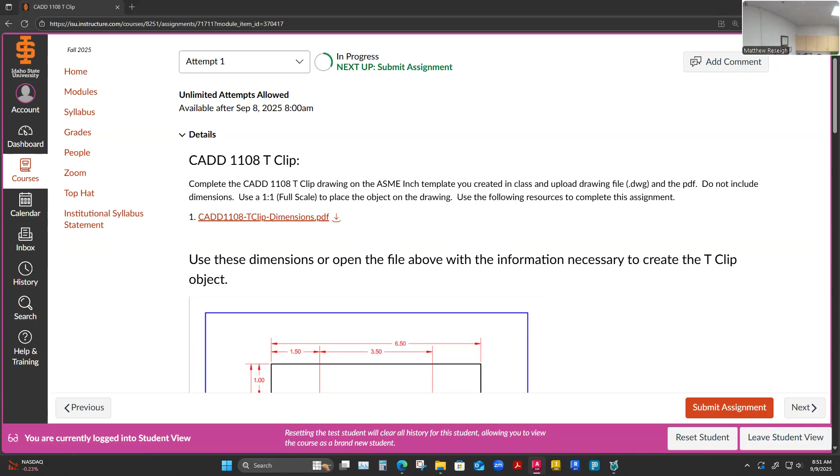So I'll open up that, make sure that I can here. Should be the T-clip dimensions, right? So I have it. This is it. This is what we're going to do.

I should have all the information here I need. It's really just a big, long, odd polygon, really. So I might just pick any point to start. But I might hit dead ends on this too, so we'll have to see.

I don't have any degree measurements given. In ASME standard, it's not always—in fact, I should hold my tongue here a little because I think you can add degrees to drawings, and in some places I worked, degrees were just a really great dimension to go to. But ASME, like my preference, is to do almost like coordinate value dimensions, giving an X and Y dimension to lock in a point, kind of like this point here to start this drawing might be, you know, 1 3/4 over—well, I don't know, let's just think.

So I'm just thinking of the way I would proceed to draw this. I could really start up here, and I'm kind of starting to pre-plan my draw here. So if I start this object here, I could go 1 inch down. Then I don't know what this length or degree is, other than it kind of ends at 4 inches, but I really don't know what slope this is.

And then it would pick up, and I would have a dimension here that's not explicitly given, but I could probably figure it out. So I feel like this could be a little difficult to figure out. I could definitely do some construction line work given what I have, that I come 1 inch down and then 1 3/4 over here, and I can lock in where this point is to figure this out.

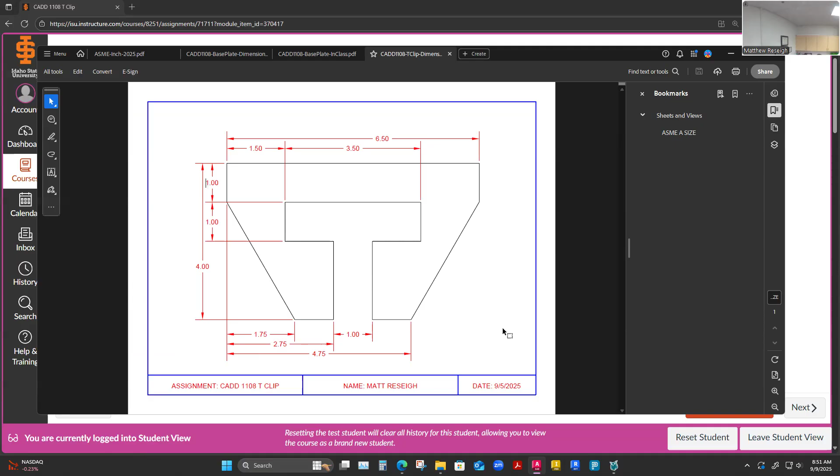So in this case, I could almost revise this dimensioned drawing to maybe be a little bit more clear. There is some room for error here maybe, but let's just see if I have the information given. If I use some construction line work, can I figure out where this would be? Let me show you maybe a little technique for this.

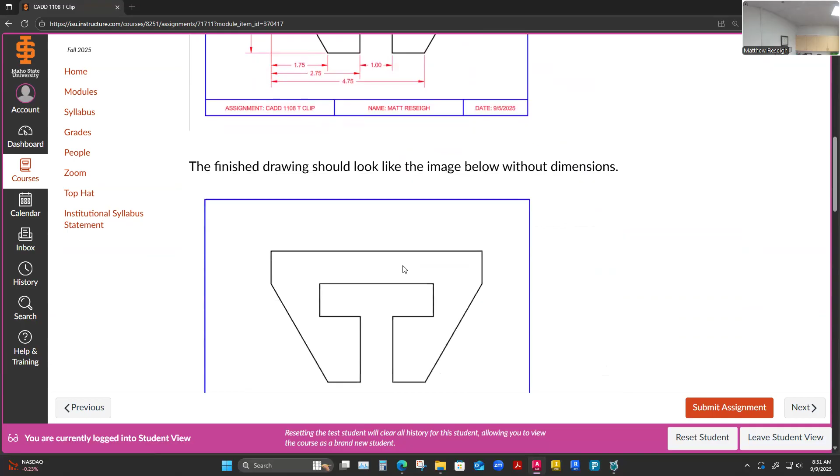So I'm gonna have this up on my other screen, and I'm gonna open my template file. Essentially I've got—this should be the same file that I just opened, and then this is essentially what I need to finish. So pretty similar.

I guess on the last one I didn't go through the rubric to see, but I was hoping on that last rubric maybe it did say something about the circles and the 1/4 inch extension on the circles. I'm not going to worry about it in this assignment, but just pay attention to your rubric too.

This is the way you self-check your drawings, and we'll get into self-checks and how critical they are. Nothing should be submitted until you've done a self-check and gone through these line items, checked back to your drawing and asked, did I catch that? Did I catch that?

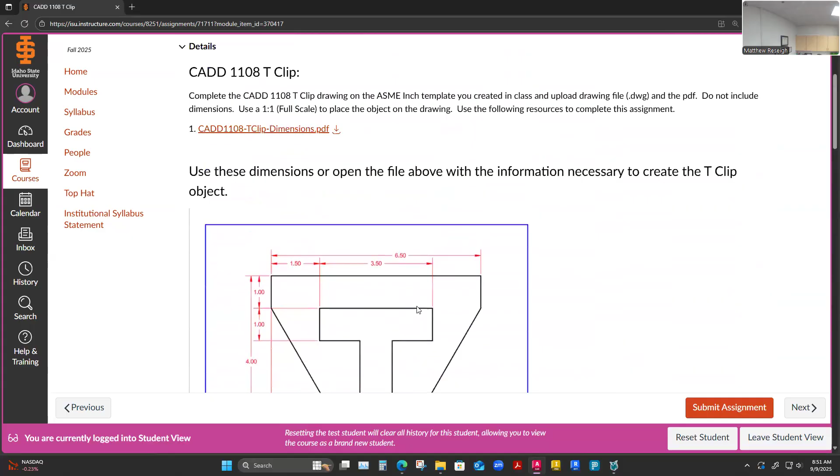So a rubric is essentially like a self-check, and it works really well because usually we don't submit drawings without doing a self-check, even in the industry. No checker in the drafting world wants to catch everything themselves. They'd like you to self-check and catch a bunch of stuff before you submit it to another set of eyes. The more organized the company is, the better the self-check process is. And usually even the checker has a specific list of checks they're looking for.

Let's do this. I'm going to go to CAD and open up my template. Funny how that makes my screen inactive. I like to do this repetitively because I have to look for my DWT file - the more repetition we do, the better you lock into a routine. So I just need to find my template, which I'm getting good at finding. Open it up, and immediately do a save as to get it into a drawing format. I'll remember to check this time.

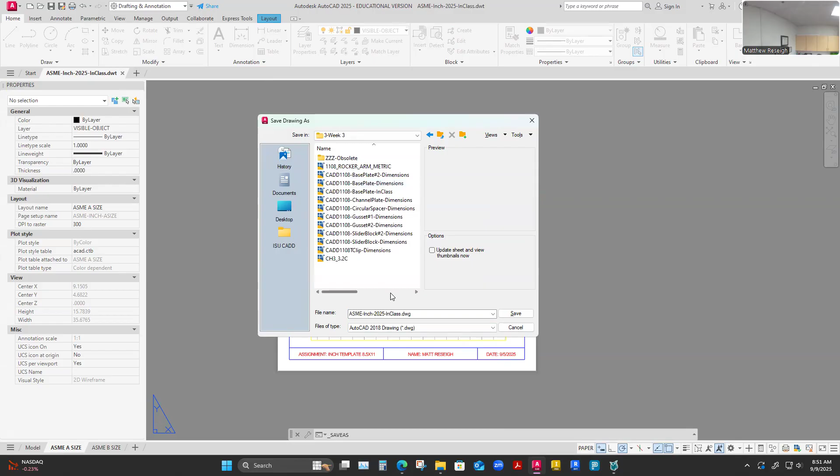I want to put it in the same place - week 3 is where we're doing these things. This one is the T-clip, right? I'm going to change my name just a little bit. I selected that one because it populated that name when I clicked on it, and sometimes I use that to my advantage - if something is roughly the same name, I can click on it and it'll auto-populate the name. If you keep it the exact same name, it'll ask if you want to overwrite that file, and I don't want to change any of these. I just needed a slightly different one since I do these in class.

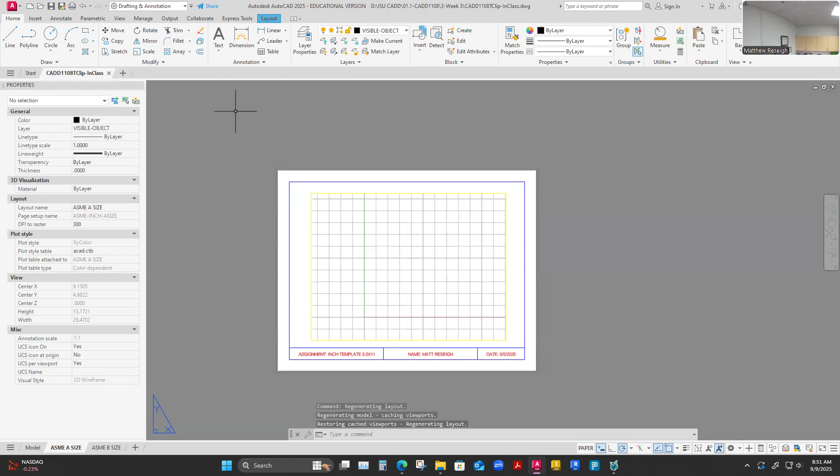Is how I notate this, right? T-clip in class is how I differentiate my drawing for myself. I'm going to save this now - it's a DWG up top with a different name. Love it. So I'm going to go over and draw now. I've got that up on my other screen. I think I told you I'm going to start in the upper left of this one, and maybe I'll start with... I know what I'm going to do.

I'm going to turn on my construction layer, make sure it's on. If you've read some of the PowerPoint slides or the textbooks, they talk about the glass box method. I like that my construction layer is light blue because it looks like a glass panel. I'm going to build a little glass box - a single pane, not a three-dimensional object, just a front view or a single view. I'm going to build a box that's the overall dimensions of this part, which might help me narrow down the geometry within that boxed-in shape.

So what I'm saying is, and you'll see me do this method especially when we get to orthographic projection, where we have a three-dimensional object and we're drawing a top, front, and right side view - I like to use this method to capture where that view fits. If I look at this part, just the overall rectangular shape, this part is 6.5 inches wide by 4 inches tall. So I'm going to make myself a construction rectangle that is 6.5 by 4, and everything I draw will have to fit within that.

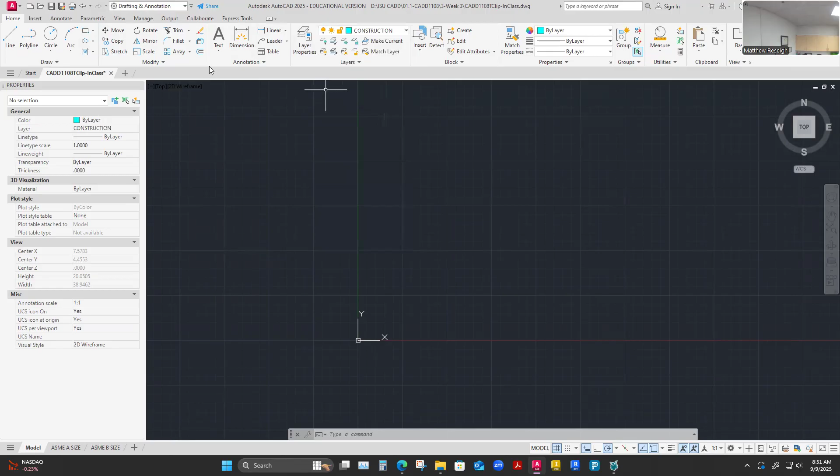So here, I'm going to move to my construction layer and draw a rectangle anywhere on here, but I want it to be like this little glass pane. So this is going to be 6.5 inches in this direction, tab, and 4 inches in the other direction, right? I don't know.

I should have it up on my screen somewhere. Yeah, right here, 4 by 6.5. So all I've done is just done the box where that fits in. Now let me see if I can piece together some of this. There's a lot of different ways I could put this together.

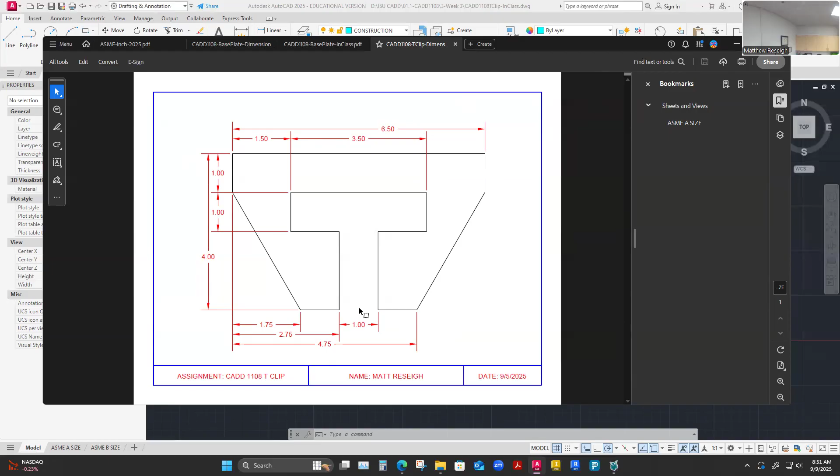So a way I could proceed with this, not the only way, but a way I could proceed, is I'm going to draw some visible line work now, some of my visible object. I can do a line, sure. Maybe I'll join it all at the end.

So from here, the shape goes down 1 inch. I haven't clicked, I just dragged down to 1 and clicked there. So it goes down 1 inch there, okay. Maybe I'll go back this direction now.

So it's there. Then it's going to come over 6.5 inches. And then it's going to come down 1 inch. Maybe I'll escape. So I've been able to pencil in that much.

1 inch there. Now that from that point, it's going to come at a slope until it hits a point down here. I just need to know how long that is. Well, it's like 1 3/4 according to my drawing.

So I could actually come over here with my line again, lock into this one, pull this direction and say 1.75, that's 1 3/4, hit enter. It's going to move me over there without drawing. And that's what I want.

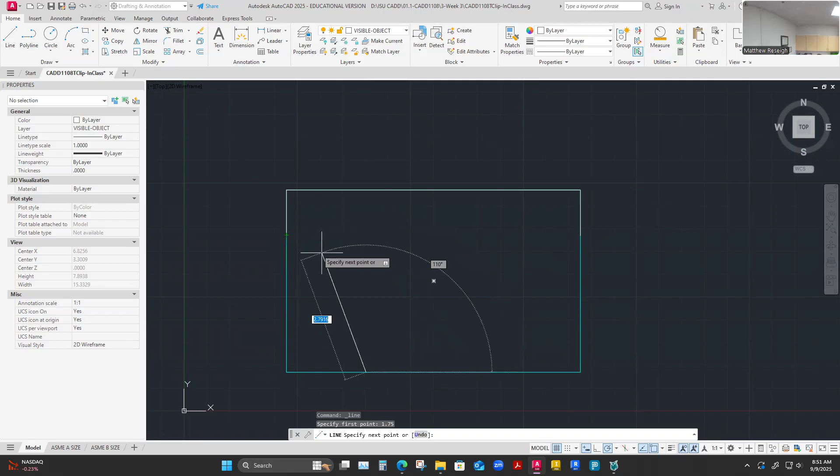Then from there, this thing comes up to here, and I want to lock in on that endpoint. So I might have to zoom in, look for that endpoint grip to show up. Yes, so that way I almost use my glass box method to kind of constrain myself. I don't know what that degree is. I just know that it's 1 3/4 over from this particular plane.

So then I pick up on some more dimensions, right? Like it goes over 2 3/4. And if I'm looking at how far the next thing is right here, I've got that point, I've got this line in. Then I need to know how long this is over.

Well, I have to do some math here. Whoever's dimension this hasn't given me that explicitly, that dimension. So I have to do some figuring. And this is when you get into working from something like this, you're already working from someone else's drawing, and you kind of realize, would that have been handy to have that dimension put on there?

Would it have been redundant? Should it have been put on there? These are all questions you have to ask yourself, because right now I have to make a human calculation here. And can I make a human error? For sure. So right now I have to say that's 1 3/4.

This next one over is 2 3/4. So I can do the human error, I mean I can do the math and say that's 1 inch over there. But what if you mess that up? Then you got a messed up looking part. So you would wonder if this dimension would have been nice to have explicitly displayed on here.

And that's just a question you have to wonder. It really highlights it when you work from your own prints, whether or not you've left somebody doing some math on their own. In some cases it's okay, and in some cases, should I have not made them do math and have to mess something up potentially?

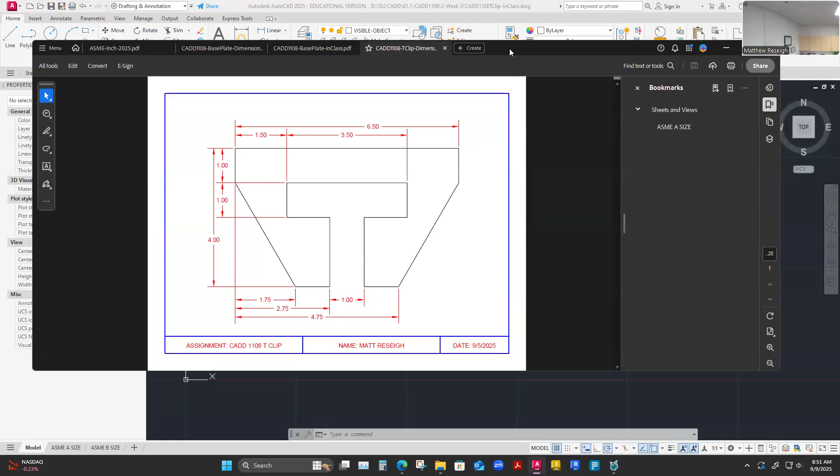So sometimes when I'm working like this, I'll make notes of maybe something I might need to define better on my own print. So these assignments that are given to you aren't meant to be perfect for sure - they're trying to create that thought process.

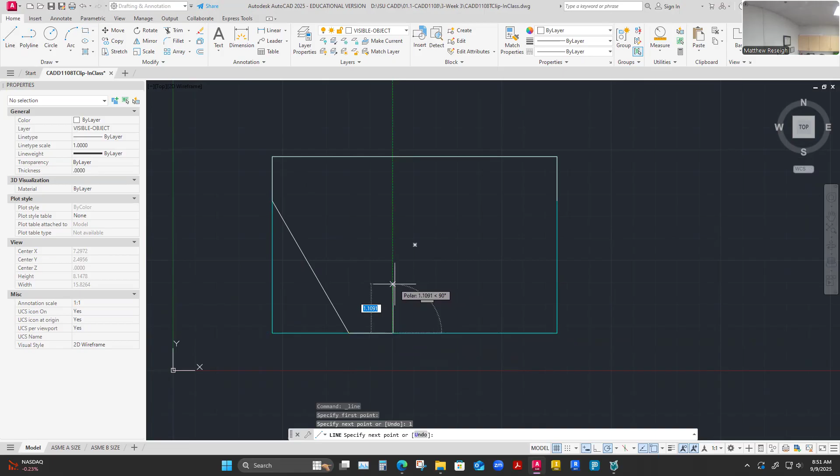So what I have figured out, back to my drawing, is I did a little bit of math and I did figure that from here, it's 1 inch over. One, enter. From here, it goes up 2 inches - we decided, yes, two, we had to figure that out. And then from here, it goes over. I never did figure out what this dimension is, so I really don't know. Maybe I'll just stop there.

Okay, so how am I going to piece this together? Well, I might do some more construction work. I might flip over to my construction layer and put in some lines here. One thing that would be helpful - I could work over from the center and maybe piece this in. So maybe one construction thing that might help is if I came over here to the midpoint. This is a triangle, is a midpoint of a line. I have a midpoint here as well from this little line segment, but this midpoint I'm picking up is the glass box midpoint. Maybe I'll find that and do another construction line up through here to this side - midpoint to midpoint. That's kind of like a center plane of this part.

And then I might do another one across here. I might take another line from this, 1 inch down - we drew this line 1 inch down. Maybe I'll draw this one across. Because what I notice is when I look at this, is that this particular line here, it's 3.5 inches long, this bottom of this T clip slot here. It's like it's on the same point as this 1 inch. So this is 1 inch down to where this turned. So where this line exists is kind of like 1 inch down.

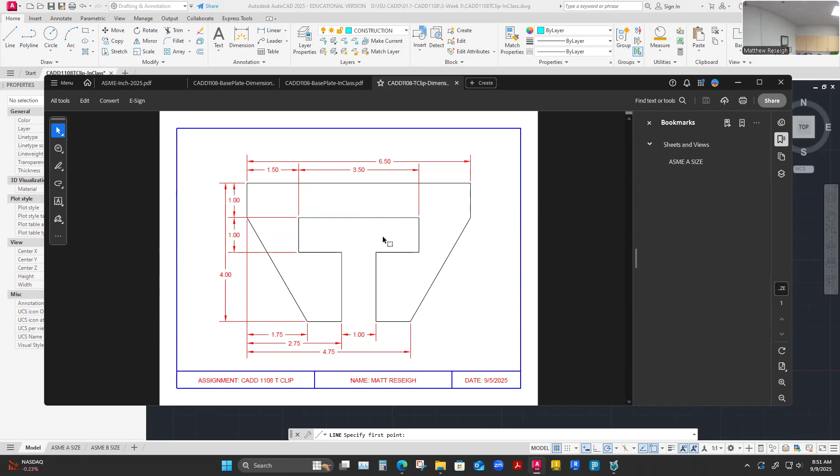So I might go to the center point, try to figure out where center is here, and then draw back half of that distance, and then come down 1 inch, and then come in and hit where I left off there. So I might proceed this way - this is just one way. I might proceed from center over and over back to this point. So let me do that. I might need to know what half of 3.5 is. And if you don't know that off the top of your head, that's what we have a calculator built into CAD for - I always have my calculator function right here ready to go.

I keep a calculator locked in, though that doesn't help you since your setup gets wiped and any customization won't stay. I always keep my calculator handy. If you search for calculator, in Windows 11 - and even all previous versions of Windows - there's always been a calculator built in. I use it a lot. I'm going to minimize it for now.

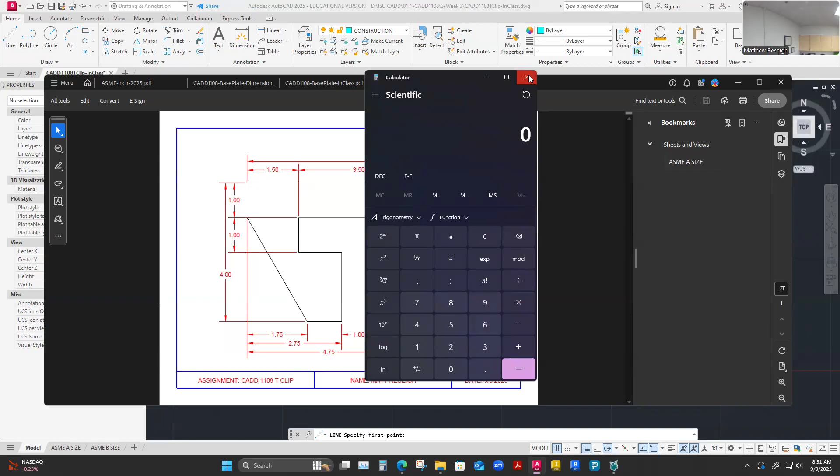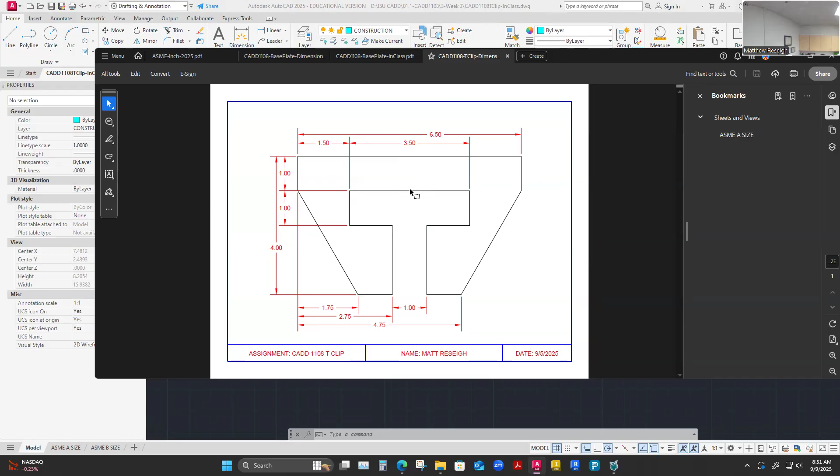Okay, let's go back and draw this in. It's 3.5 inches, so I'm going to do a construction line from here. I know that line is somewhere on this plane. This is more construction line work - I drew a line totally horizontal across, 1 inch down from there. Where these two cross is kind of the midpoint of where that line would come over, down and over. I'm going to use this crossing area as the reference point to draw the actual line I want. That's going to be half of 3.5 right here - whatever half of that is, I'll draw over and down and over. So let's figure out what half of 3.5 is.

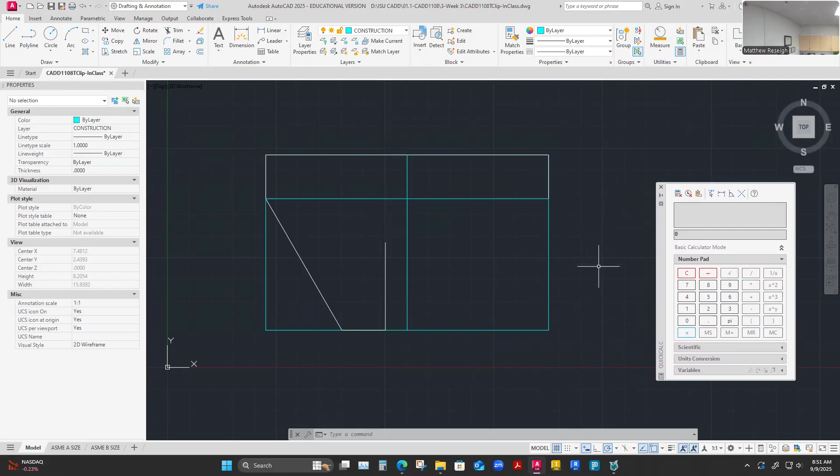I don't know, let me use a calculator. The other calculator you have access to is up by your measurement tool, your really powerful utilities palette - there's an embedded calculator, super handy. You click on this, nothing happens. Click again, something happens because I clicked on another program. Here's my little calculator - I don't usually dock it anywhere specifically, I just like it to pop up out of my way. I think it'll generally pop up where you last used it, as long as the program's tracking you and not getting wiped. I can just enter in, click in, or type with the number pad - so 3.5 divided by 2. It's 1.75, that's the answer.

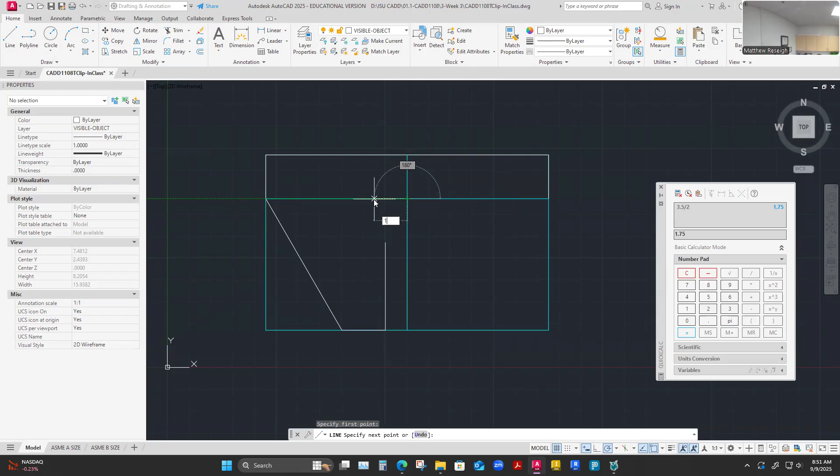So I'm going to go back to my visible line, and that calculator will just stay docked there in case I need it. The visible line from this point here actually comes over - I did click there because I'm pulling this line. I actually clicked hard here, and now I'm drawing this line over the top of that other line. It's on a different layer, so I'm trying to keep track of lines over lines. It's 1.75, half of 3.5 - enter. Then I'm going down from there, 1 inch down on the drawing, and it should hook up perfectly. There's the snap right there. And escape.

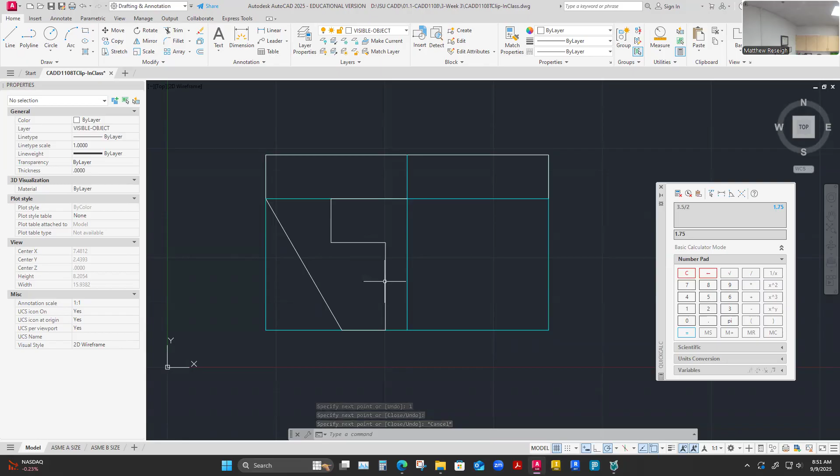Awesome, that's like half the shape. I could go back and start drawing all of that the same way, or I can use mirror. I've essentially drawn half - you notice that I've kind of drawn half, I started with more. So I might come back and trim this out or delete it. This is a separate line segment since I never drew a polyline, so it's not connected. If I had used polyline, I might need to use explode to break up the line segments differently - that wouldn't be wrong, I'd just need to explode it to get to an individual segment.

But I think I'm going to delete this white one that's over the top - I'll delete that one. This one is a full length line, so I could either pull the grip back to there, or I think I'll just trim it. If I go to trim and pick that one line, it's going to pick whatever's on top - we'll talk about that. There are ways to choose which line is on top. This might be a good place to at least introduce it, and I'll need to come back and use it more. Because we have a line on top of a line here - I had my glass box rectangle, and then I drew lines right over the top. So I'm getting to that line over line situation, though they are on separate layers.

When you do that, you can always bury a line over a line. Usually whatever you can see is what has been drawn last, on top. It's kind of like building a layer - the last one drawn is the one I can see more, and it starts to bury the one underneath it. But you can always pick to send whichever line you want to the front.

Let me show you how that might work if I can get to it. On the modify tab, there's a really powerful expandable list down here to the right. This thing has a lot of power under it - look how big it is. Oh my gosh, this is buried - totally hidden.

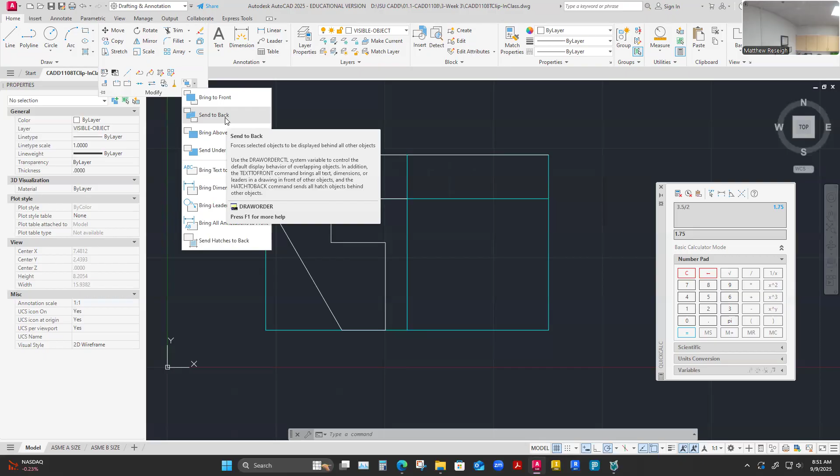I feel like I use these two functions mostly. Right now my white line is on top, which makes it easy to trim - it's going to be the one that gets selected because it's in front. If the other one... let me see if I can actually bring it.

I'm going to see if I can bring this box to the front. I don't know if I can, because I'd have to tab-select it to find the one. So it's going to be hard for me to actually get the box into the front here. I just wanted to bring that up though.

Maybe I'll show you here - these two lines, I can get to each one individually a little bit. The white line here is definitely in front of the construction line, but I could bring this construction line to the front. Let me try it right here where it's a little more obvious.

Bring to front, this one. Then I'll click enter and see how it buried the white line behind it. You just brought this one up as priority - bring to front. I could also use send to back to bring it behind.

I feel like I'd probably use bring to front more, when I'm trying to find one. But in this case, this would be a good candidate for send to back. I'm going to send this line to the back behind everything else. That just shows overlapping stuff - I can prioritize what I can grab and what's going to be trimmed or active.

Maybe I just need to modify which one is in the front, which one's in the back. We'll dive into that more - I was just exposing you to that option here.

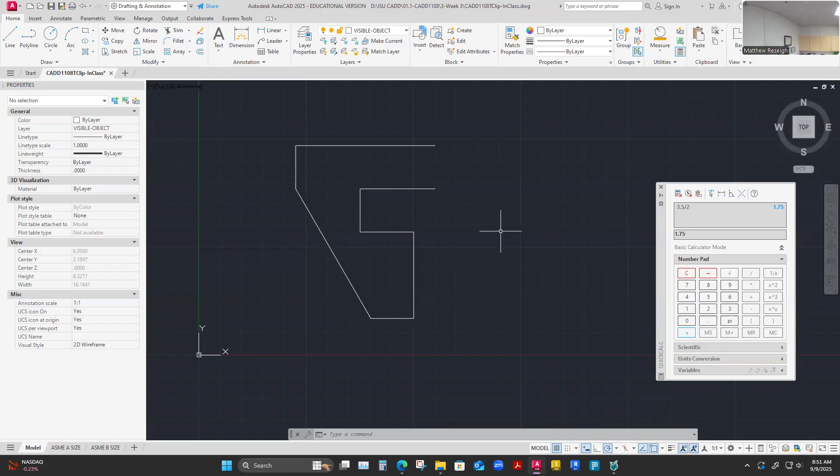Visualize if there's a shortcut here—sometimes just drawing half of what you need is a quicker way to get the whole thing drawn. Right now I've just drawn half, so if I bring up my construction stuff, I'm gonna mirror this line.

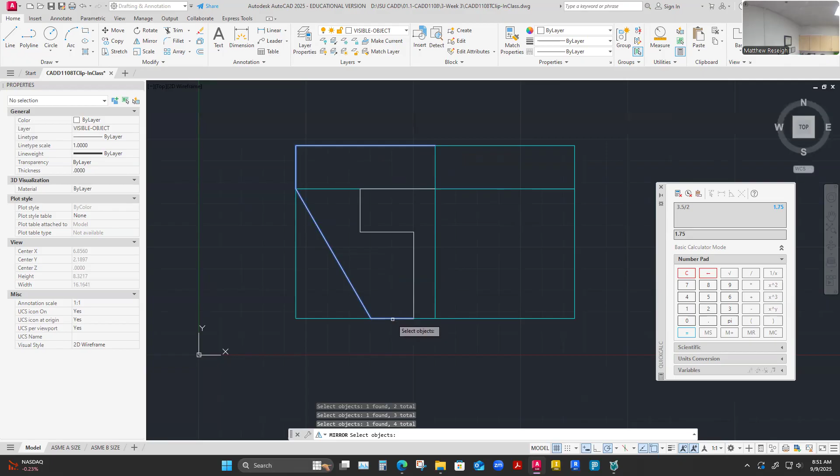I'm single selecting, going through carefully. I could group select and then deselect. If you hold down shift, that's another thing to show: if you've lassoed stuff and don't want that in there, just hold down shift and reselect it and it'll remove it. Even if I pick something I didn't want, holding shift and re-clicking keeps me in the command but deselects it.

It'll be the same if you've lassoed something in—you can hold down shift and localize what you want to deselect or actually select. In this case I'm just going to keep clicking these around, but remember, hold down shift and deselect it if it wasn't something you wanted. Otherwise we get in the habit of getting out of the command and redoing it, but there are options within the command so you don't have to be perfect.

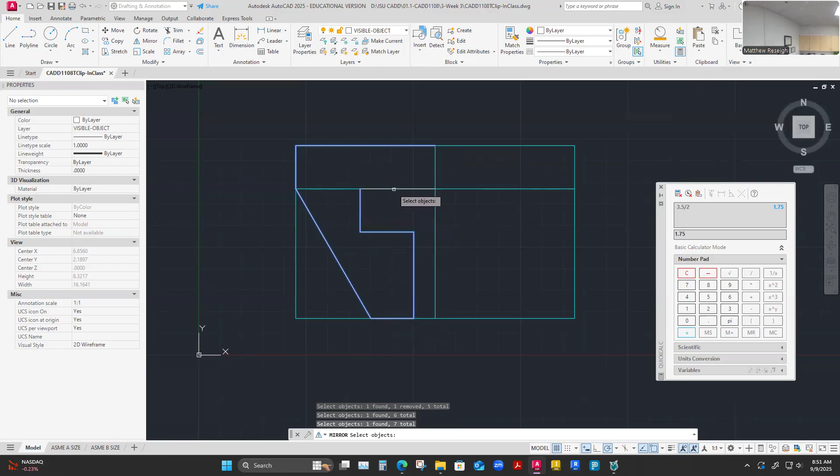But this is the shape. Everything's been selected, those are my objects. I'm not copying any of the construction layers, just the visible lines. So I'll right click or press enter. First point of the mirror line—a mirror line has to be 2 points to make a line or a plane. So I'm going to pick just across the center line here. There I can see my half showing up. And then, erase source objects? No.

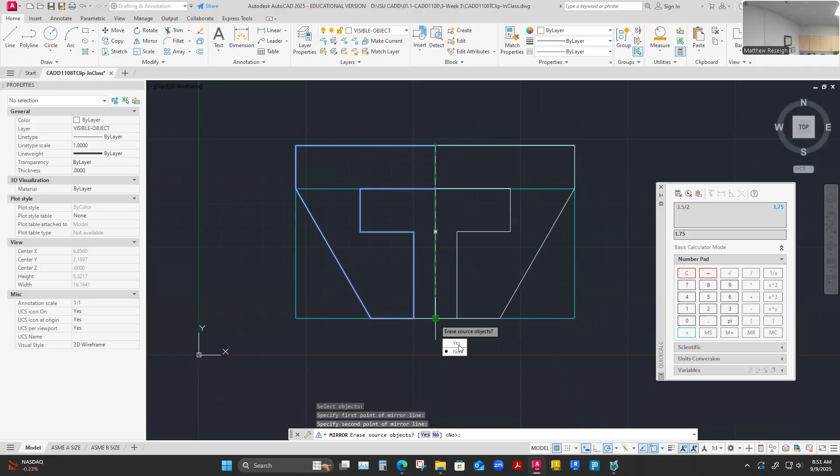Excellent. Then I'm going to take a quick look at this with the construction layer off again. Excellent, that's what it looks like. It's all individualized.

I never did make it a polyline, but now I'm going to make it closed. I think I'm going to join everything, so I'll pick the join command. This is going to be my workflow—join it as a full piece, enter it. Now I'm going to select it and make sure it's all selectable.

If that isn't working, if I can't do this, that means you've got a corner somewhere that's not aligned, and that can be a bit of a looking-for-a-needle-in-a-haystack problem. So what is my advice there? Usually my advice is, since this does a lot of different line segments, I try to pinpoint it by seeing what I can join.

So if I group selected all that and couldn't join it, I'd say I can't do the whole thing because I don't know where the error is necessarily. So I could pick join and then individually start selecting these, and if they don't go blue to blue to blue to blue, I'll know I found maybe a point that's not aligned, or a point where the grips didn't get together.

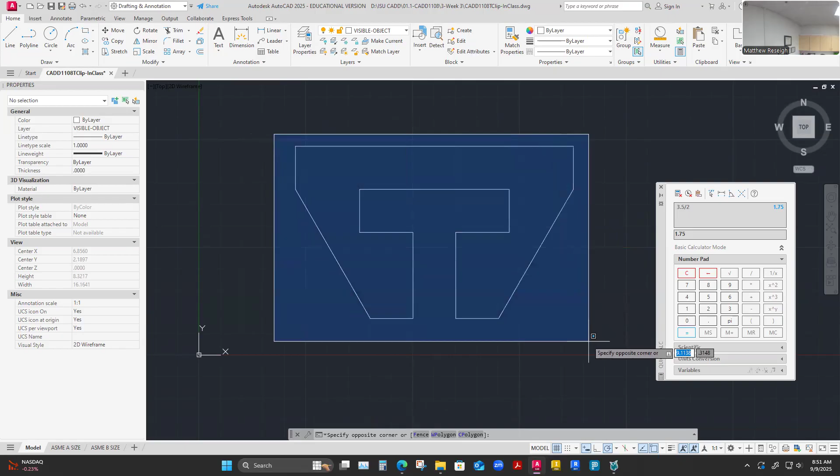If you select all these—I've got mine all hooked up—but you'd do that big selection and try to join it all, and if it didn't work, you'd come back in and do it piece by piece to figure out where it's not connected. That's just good manufacturing habit, to get your parts ready for machine interpretation—everything joined as a polyline, everything hooked up right, no errors that a laser cutter might find, which could leave a corner not quite cut. So here I'm preventing some of that machine interpretation error that might happen downstream from my part.

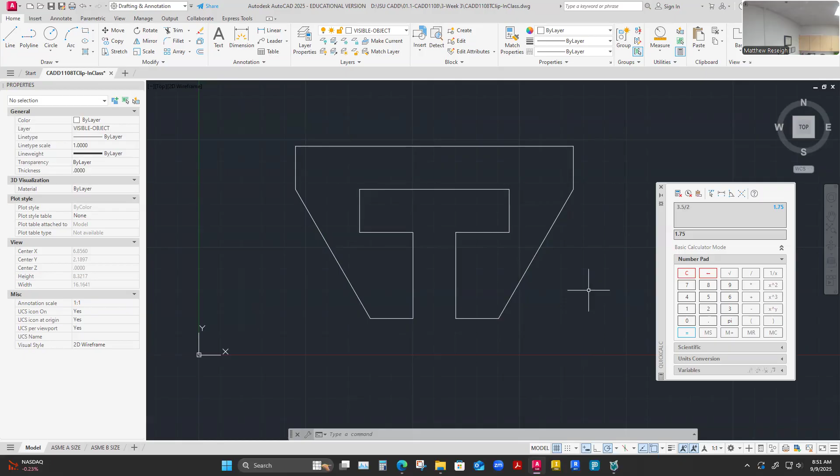So, done. This one needs to go check it on paper. Let's go back over to my paper space. Maybe I'll get rid of my calculator, and let's go ahead and...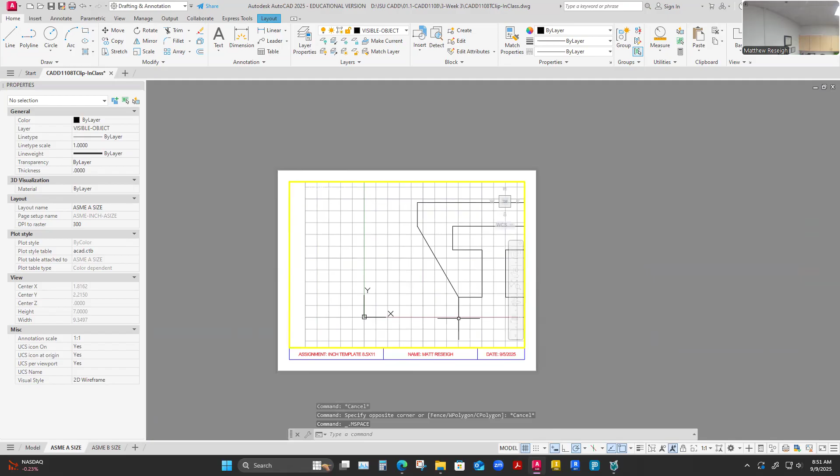Resize my viewport—I'm actually just moving it out here to these grips. I'm going to get in, click in, unlock it, scroll it over here. I'm going to put it at 1 to 1.

It's already at 1 to 1. I'm just going to center it a little bit better. That looks great. Center. Lock it down.

If this annoys you to see the grid, you can turn off the grid. It doesn't print, we've noticed that. I just sometimes leave mine on, maybe it's an alignment thing, but this is how you turn off that grid, even when you're in model space.

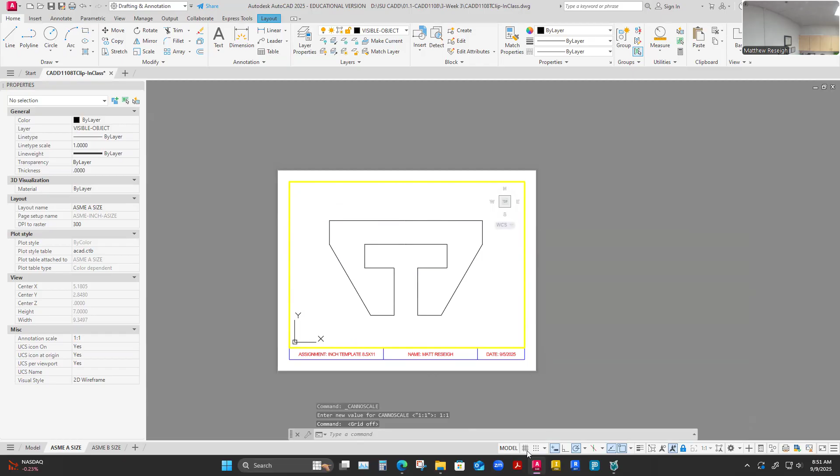So you can get a little closer look at what it looks like before you even hit print. I'm going to jump in here, change this name. I remember this time, this is CADD

1108 T clip. Whether there's a space there or not is not really important. T clip. The date is

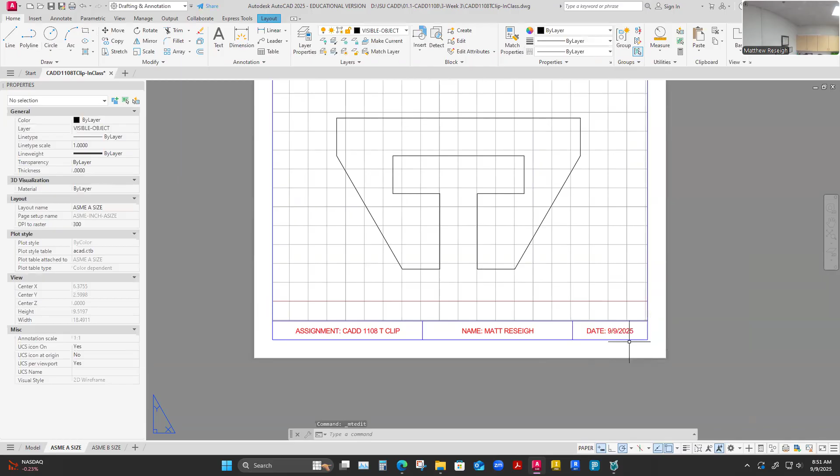the 9th. I want to stress the importance of dates on your drawing. It's super important, like dates, you'll always have a date in a title block, and when you do revisions, you date them, so keeping the dates is super important. Yeah, always have been in drafting.

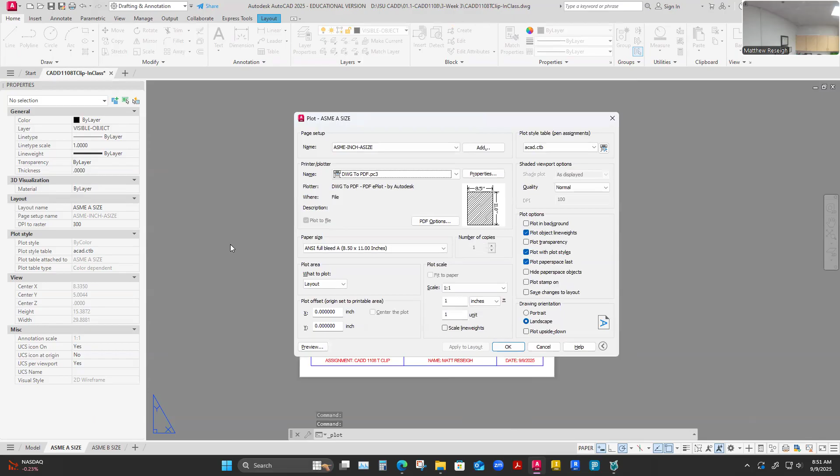So let's do a print preview. Control P or use your print button. Let's do a preview. Hey, this looks good. There I see the actual object line weight with a little scroll. I think maybe if I just do this, it kind of shows zoom to fit and what the line weights will look like. So this is good.

Done deal. Save this as a PDF. So maybe I'll do that. I'll say, okay, I love the look of that. It's already driving me down to that week, but technically I'm in week 3 with this drawing, and it's

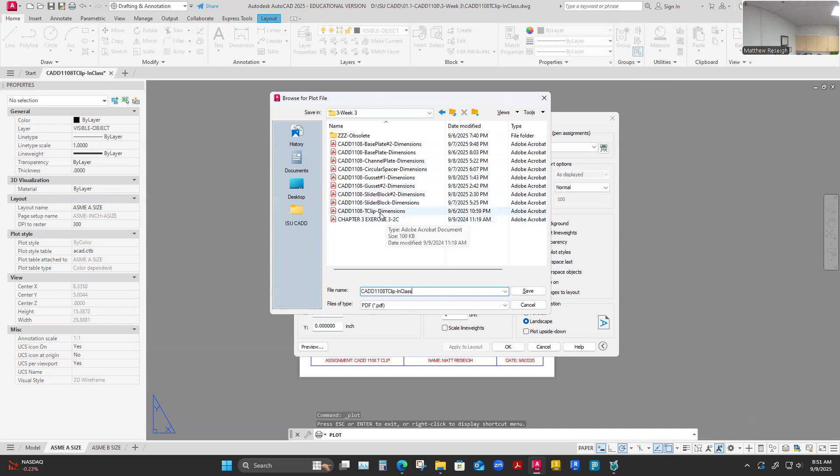T-clip in class is what mine should be. Yeah, I think I noticed that I didn't put the other in-class one in here. Save. I've got it there now.

It should open the browser to preview it. One thing I wanted, a little file management for me, is sometimes when I do this, I figure out like, did I actually put that last week assignment in this? I bet you this one, I bet you in here I have like an in-class. I should have the in-class spacer, but am I wrong?

Did I do the base plate in class? That one. That's in the wrong place. I knew I did, once I couldn't see it. It's my base, the last assignment I did, I like

didn't save it in the right file, so it lives in here. This happens all the time. You got to keep track of your files. This one should have been in week 3. Now when I go over to week 3, oh, it's open.

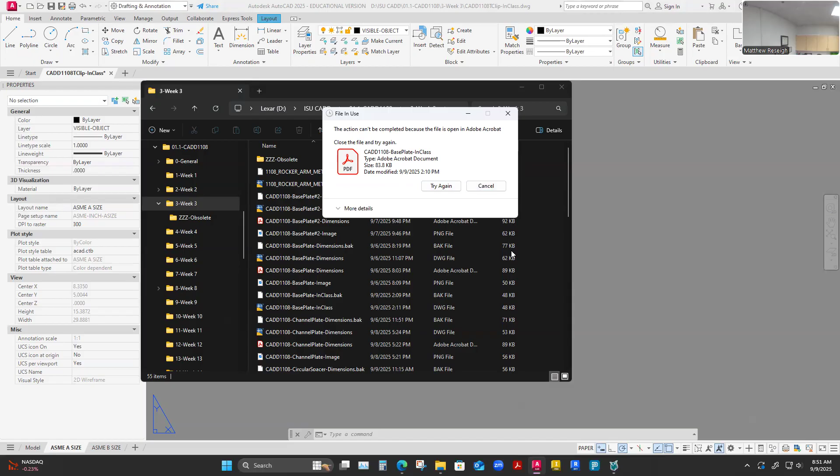So see, that's the error you'll get if you're trying to move a PDF, especially in my file moving, and it won't, I actually have to close it. Currently, it's open in my PDF viewer. Not that one, this one. Yeah, my PDF viewer, I have lots of them open.

I have the template, I'll close it. I have that base plate that I use as dimensions. That's the one that I was trying to move, and it won't move because I had it open in this program, the one we just used to draw. I'd probably go ahead and close that now.

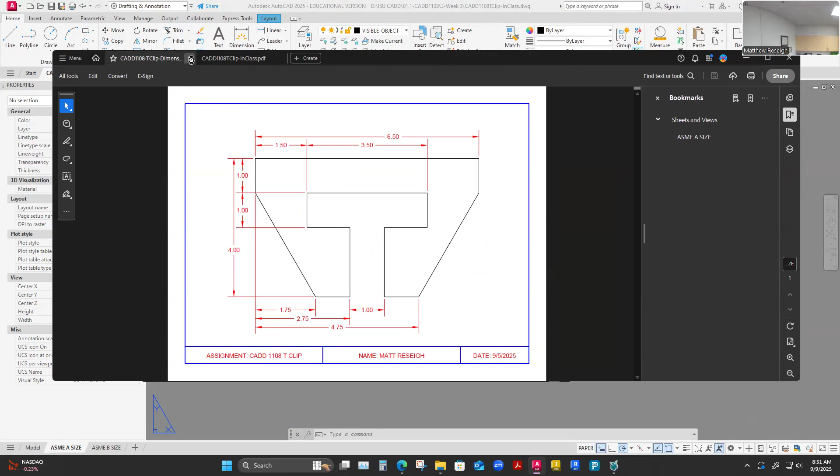This is the new one that I just saved, but now I go back to my folder, and now let me move it. It's actually in week two, I put it in the wrong one. The drawing for it exists in the right week, it's base plate in class right here.

It just doesn't have a PDF to go with it because I put it in the wrong folder. It'll usually drive down to the last folder you saved in, so you got to really pay attention that you put things where you want them. And this one, in this case, I wanted it here.

Now let me move it, I didn't have it open. So now in week three, I've got my base plate in class that I did, and I've got my base plate in class PDF. And in this case, we just did the T-clip, so I did the T-clip in class drawing, and I have the T-clip in class PDF. It just makes it easy to turn in assignments if they're the same name and right by each other. So this is my flow, those two work together, one's the drawing that's modifiable, one's the PDF.

Okay, done deal. On to the next one.